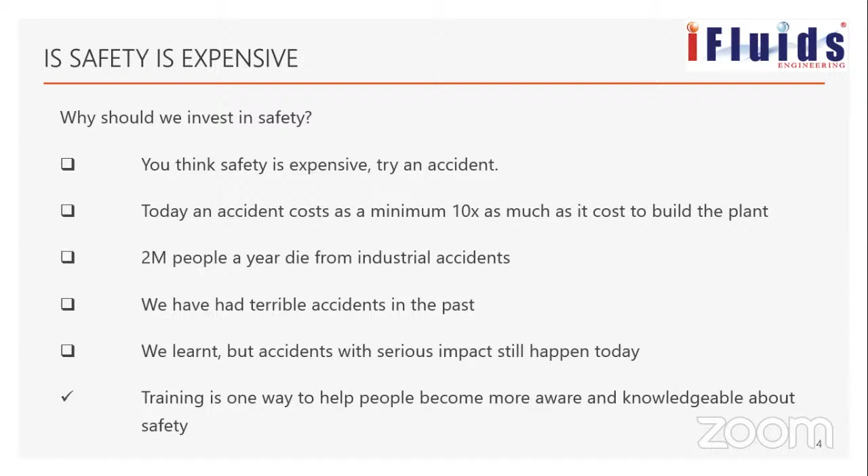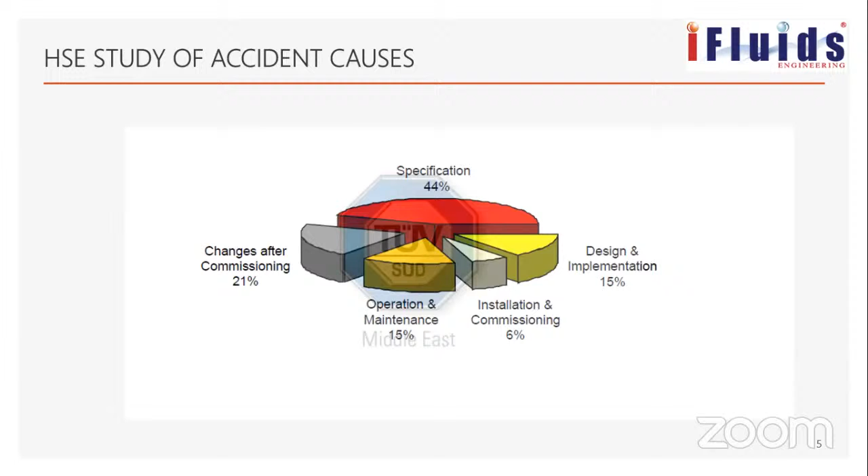This graph represents the various causes of accidents. Specification, not following the specified rules or regulations, or the material specification, contributes 44%. Changes after commissioning cause 21%, operation and maintenance 15%, installation and commissioning 6%, design and implementation 15%. These are the statistics that give the accident causes.

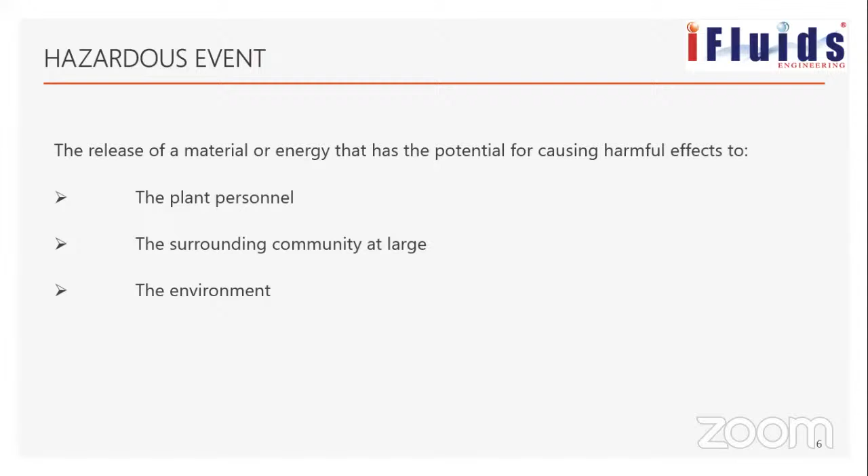Okay. A hazardous event is nothing but the release of energy or anything that has potential to cause harm to people, environment, asset, and reputation. In short, they call it PEAR. You can remember this word, pear, the fruit. It represents P for people, E for environment, A for asset, and R for reputation of the organization. Mostly R will not be taken into risk, because reputation cannot be quantified. That's why R will not be considered.

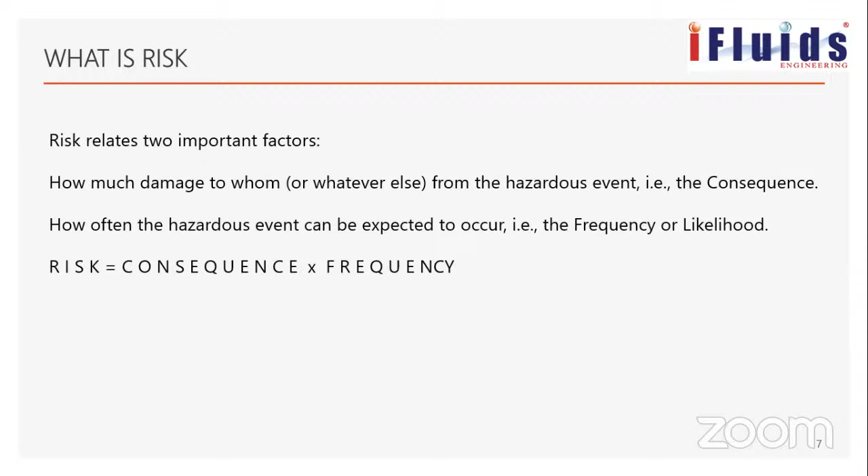Okay, risk. What is risk? Risk is nothing but the product of consequence and frequency. Consequence is what will happen, the extent of the damage. Frequency is nothing but the probability, or likelihood, of the thing happening. That is called risk: consequence and frequency. Okay. Hazard identification.

To be successful, to prevent any process hazard, it is very imperative to identify the hazard. There are different tools across the ages that have been introduced to identify the hazardous situation and prevent the risk.

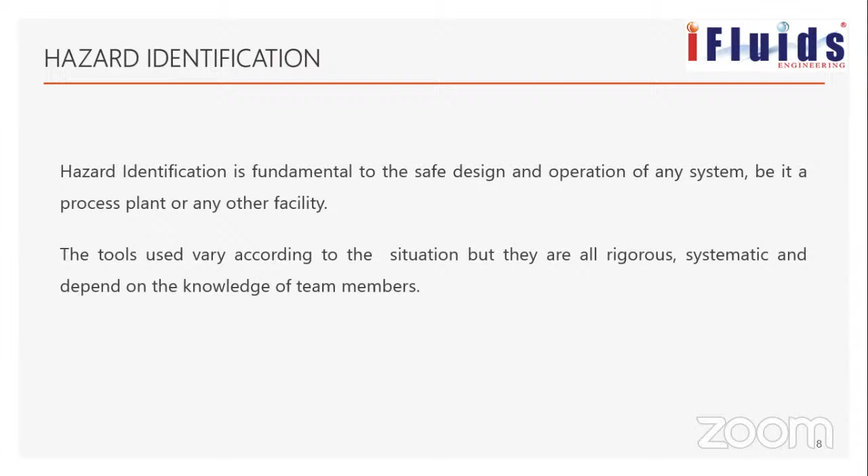One of such tools is the HAZOP. There are other tools, HAZID, ENVID. There are many tools. All those tools are used to identify the hazard and mitigate it.

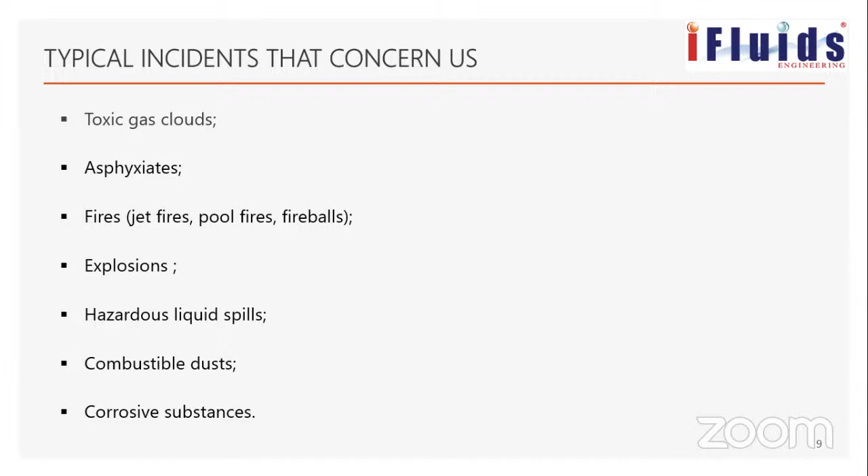A typical incident that occurs is nothing but UVCE, toxic gas, explosion, combustible - anything that damages people, environment, or the asset is nothing but a hazardous event.

What is PHA? Overview of PHA. PHA is nothing but a wider term used to identify process hazard analysis. It is a wide term. There are different techniques that are being used. This technique is used to identify any process hazard in a process.

This is not done by a single person. It is carried out by a team of people - multidisciplinary action. It is not a one-man show, but it is led by one person, contributed by different discipline people who come together to identify the hazard and come out with a recommendation to prevent it.

Mainly the success depends upon the experience and knowledge of the team. If the team is not having a good person with experience or knowledge, then the PHA is not going to work well.

Let's see the overview of the PHA assignment. When I say PHA, there are different methods - HAZID, HAZOP, QRA, all these things are process hazard analysis, ENVID. What-if analysis, bow tie - all these things are PHA.

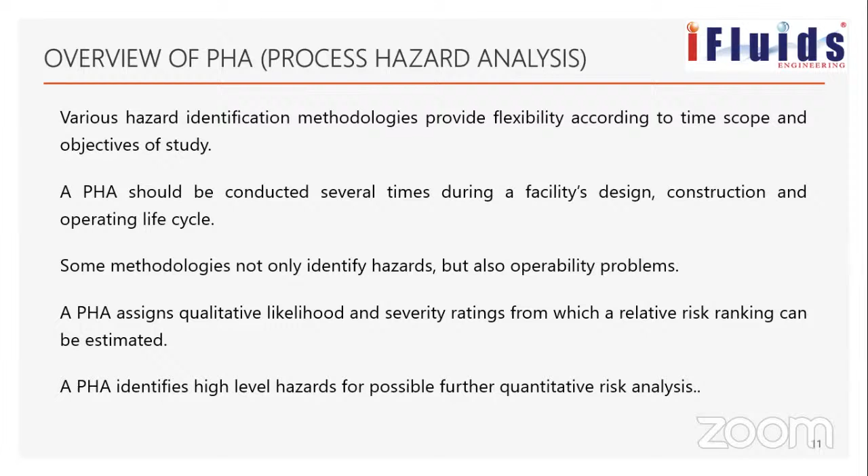Nowadays in India it is mandatory to conduct HAZOP every 5 years. So it can be conducted at any time during the phase of commissioning, startup, or during the running of the plant. Even when you do some changes to any system, or bring out some modification, then you carry out the PHA, that is HAZOP.

There is no time frame like that, that you have to carry it only during this time. What can go wrong, how likely it is, and what is the consequence - all of this put together is process hazard analysis.

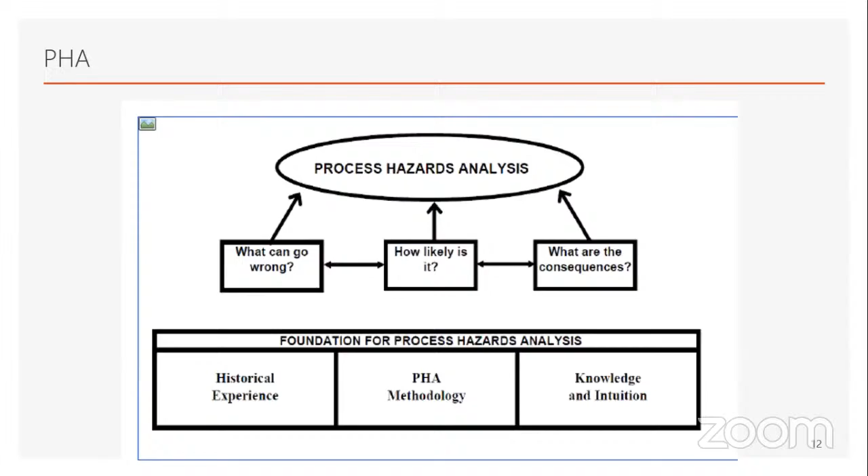History of PHA - now since we are dealing with HAZOP, I'll talk about HAZOP. HAZOP was developed in UK by Imperial Chemical over 30 years ago. Over the years it has undergone many changes. There is always improvement added, and a lot of guide words have been changed. Now the program is well structured and robust to identify the process hazard.

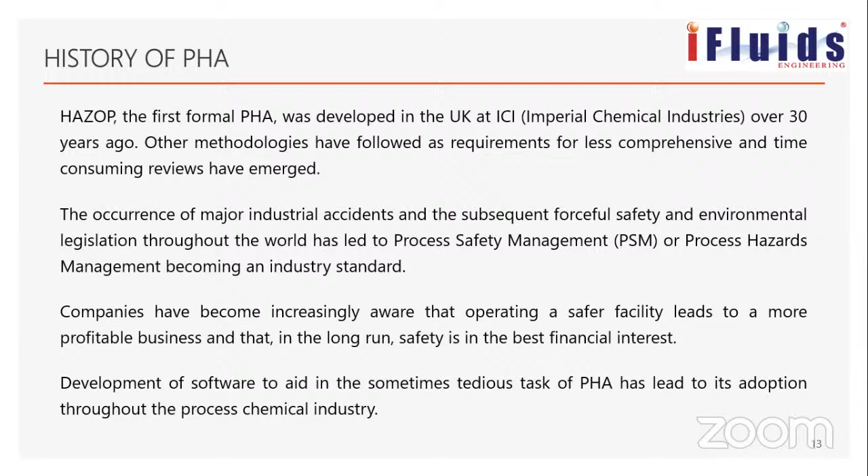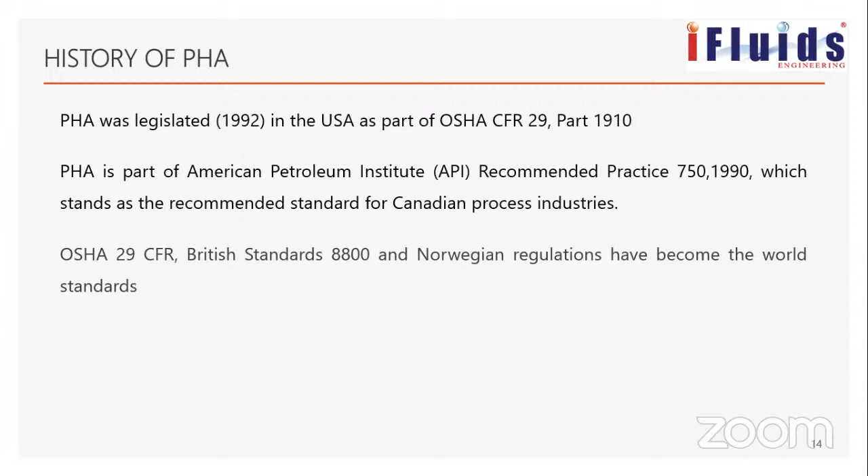As time progressed, now we use modern techniques like software to carry out this study. There was law also legislated in USA, and like in India we use OISD. It is a requirement to carry out PHA every 5 years.

Let's see process safety. There are two types of safety basically - one is process safety, another is occupational safety. Whenever I go, I tell this: process safety is nothing but like a tiger. The tiger, when it hunts, it hides itself.

It camouflages, it hides in a stealthy way without giving any symptoms. Whereas a lion, that is occupational safety - if you see it, you can see the lion in the open field, you can easily identify it. Like when you go to a plant, you can see people not wearing gloves, not wearing helmets, not working properly, not following ergonomics. You can identify all those things for occupational safety.

It is like lions in the open field - they lie in the open field and act. Whereas process safety, it is hidden. You don't know when it happens. But the accident caused by process safety is much more catastrophic, more expensive.

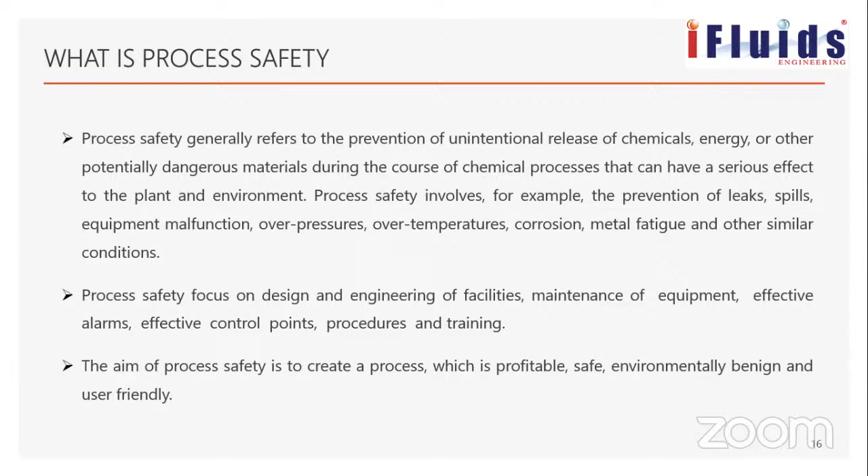Process safety philosophy. When process safety is considered, there are different layers protecting it. One is the process itself—a safe process by itself is a layer that protects process safety. Another is control and monitoring, that is your BPCS, basic process control system. Then comes prevention, mitigation, on-site emergency, and off-site emergency. These are all the layers put in place for process safety.

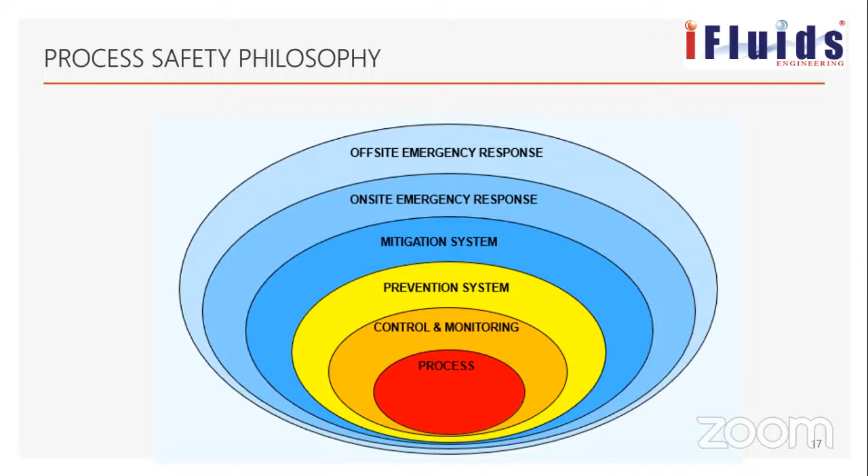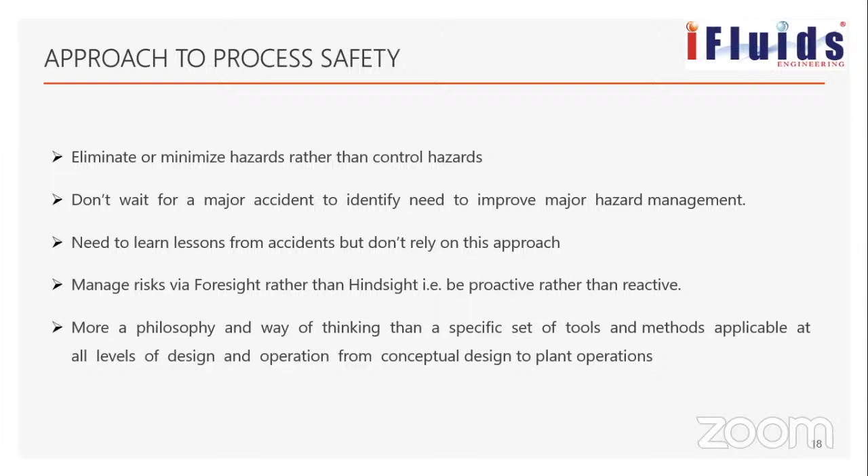Approach to process safety: our aim is always to eliminate the hazard rather than controlling it. When you cannot eliminate the hazard, you go for substitution. When substitution cannot be done, you go for engineering methods. When that cannot be done, you go for administrative controls. When that cannot be done, you go for personal safety, PPE, and all those things to protect yourself. This is the approach to process safety.

I'll tell you about one incident—everyone is aware of the Bhopal incident since we are in India. It is one of the worst accidents that has happened to mankind so far regarding process hazard. I'll tell you another example, Piper Alpha, which is also one of the worst accidents that happened. I'll give you a brief explanation in 5 to 10 minutes.

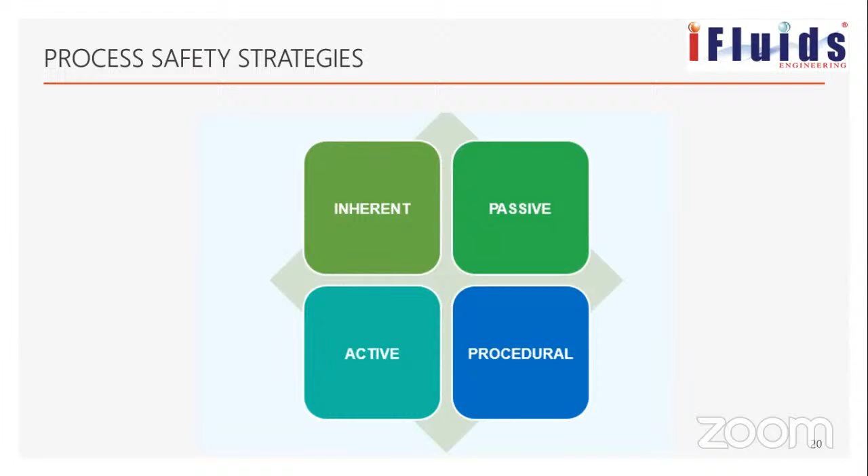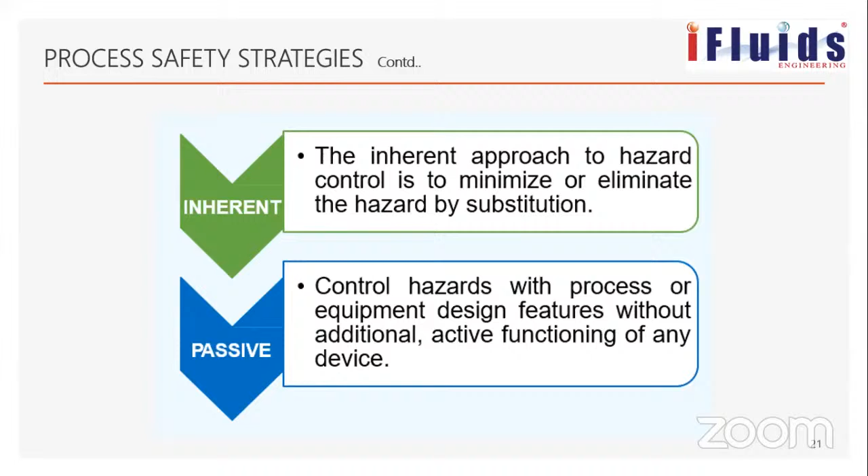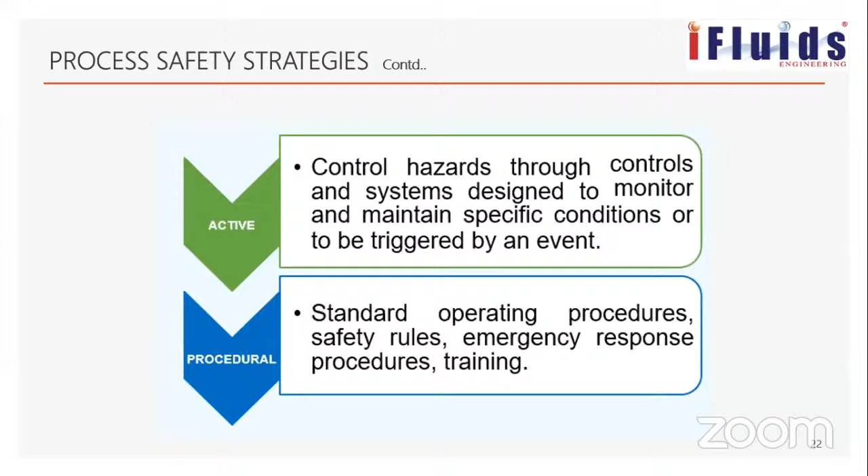What is the strategy to control it? There's inherent, passive, active, and procedure—these are the strategies to control the process. Inherent is to eliminate the hazard by substitution, as I stated. Passive is controlling the hazard without any active functioning of devices. Active is to control the hazard through system design and monitoring, with specific conditions triggered by an event, using control valves. Next is procedure—administrative controls put in place. This is the hierarchy of controlling.

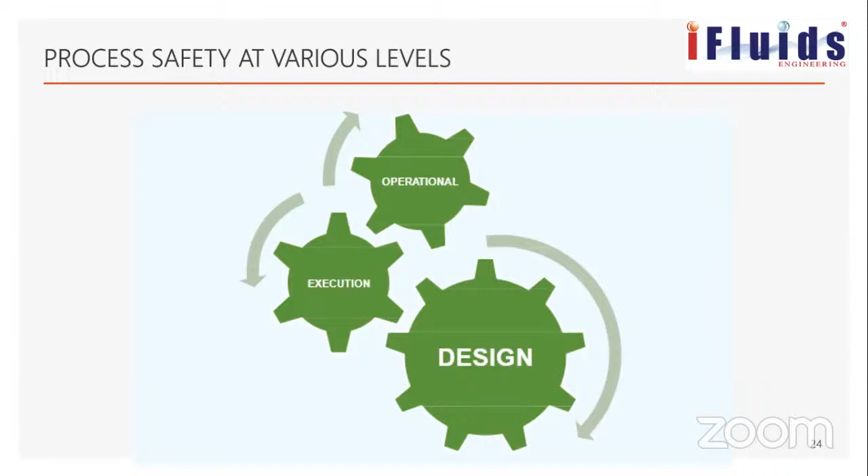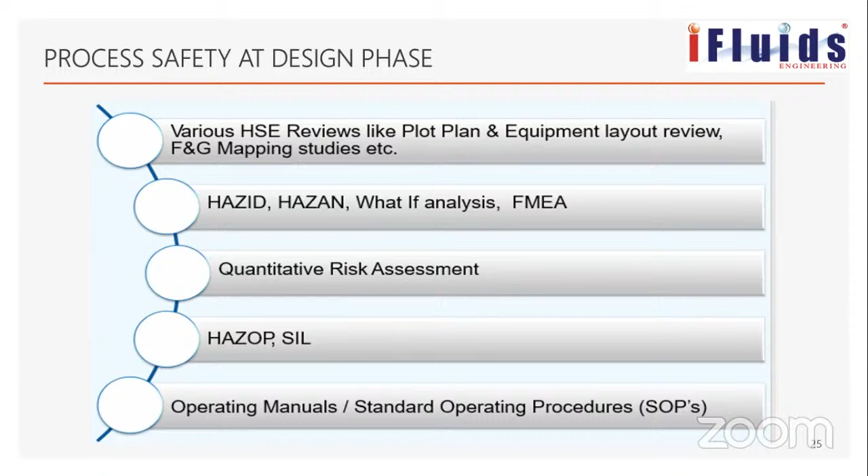Process safety design phase. There are various HSE reviews during the design phase that have to be carried out, like HAZID, HAZAN, what-if analysis, quantitative risk assessment, and HAZOP. These are all carried out during the design phase of process safety.

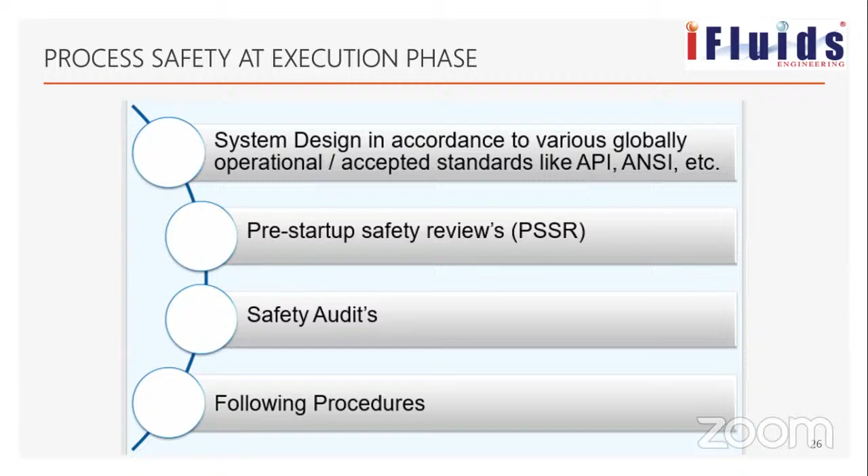These are safety at execution phase: pre-startup safety review, safety audit, following the procedure. All these things we carry out during the execution phase. Another one is the operational phase: safety audit, management of change, revisiting the HAZOP every 5 years. These are the methods carried out during the operational phase.

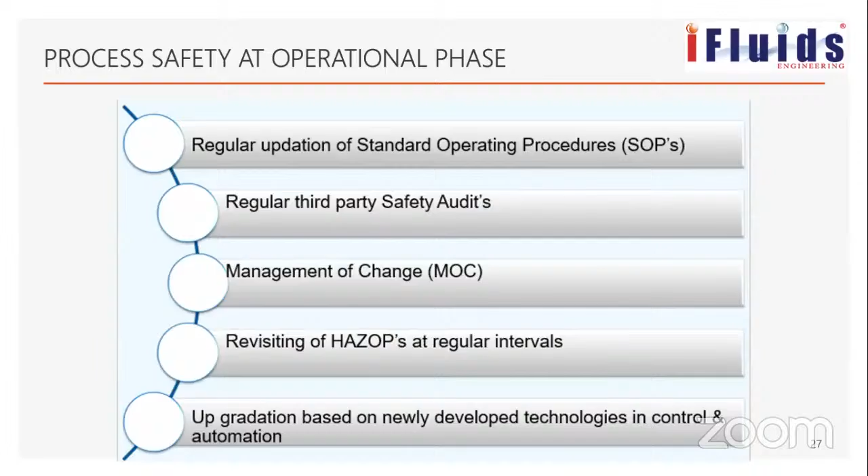PSM is nothing but process safety management. There are different standards. Some people follow 14 elements, some follow 18, some follow 20. All these are different elements carried out to maintain the safety of the process of the plant.

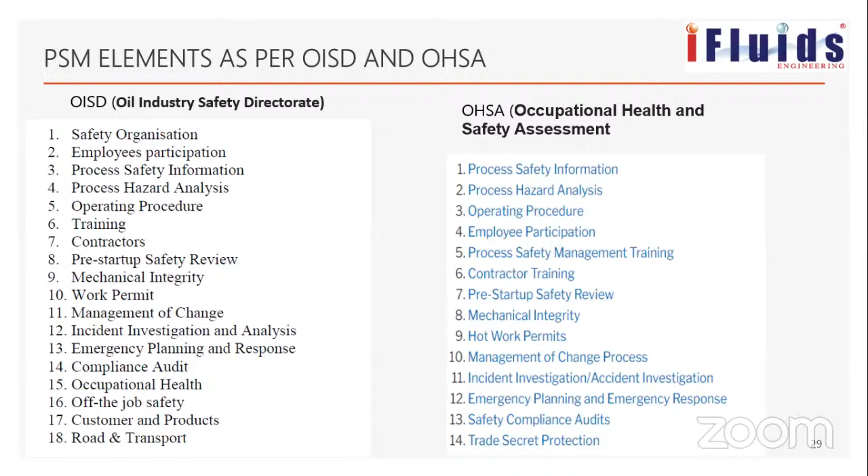This is a simple graphical representation of how PSM is represented. There are 20 pillars. The base foundation of the pillars is managing the risk, learning from experience, understanding the hazard and risk, and committing to process safety. These form the fundamental base upon which the pillars stand, and above that is the roof of process safety.

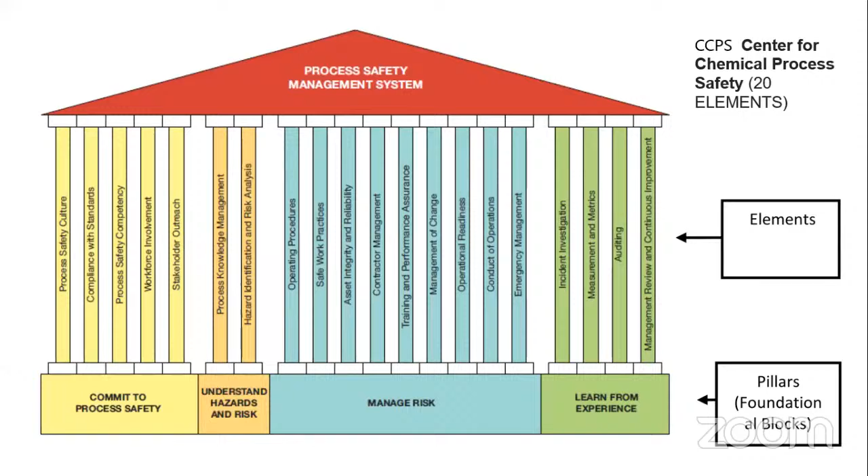The Center for Chemical Process Safety has 20 elements, while OISD has 18 elements. Now we will talk about what HAZOP is.

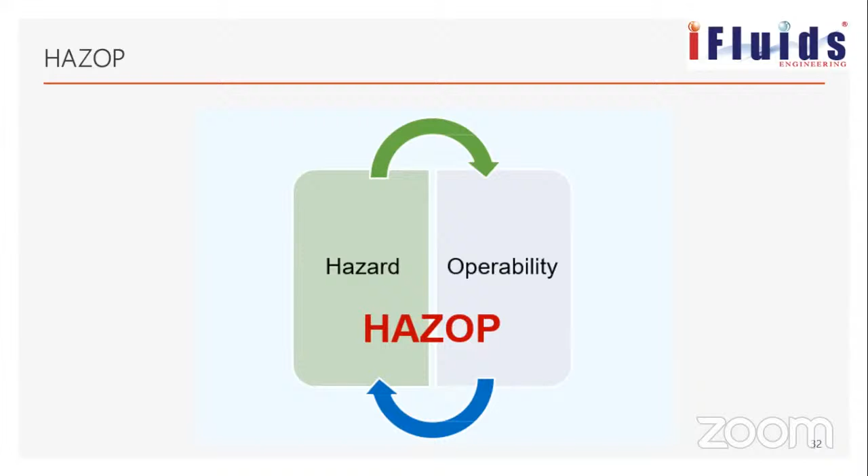This is our main topic for today: HAZOP, which is nothing but Hazard and Operability Study. HAZOP is a qualitative method. Whenever I say qualitative, I mean defining the risk in words. When I say quantitative, I mean describing it in terms of numbers. So HAZOP is mostly a qualitative method, sometimes semi-quantitative.

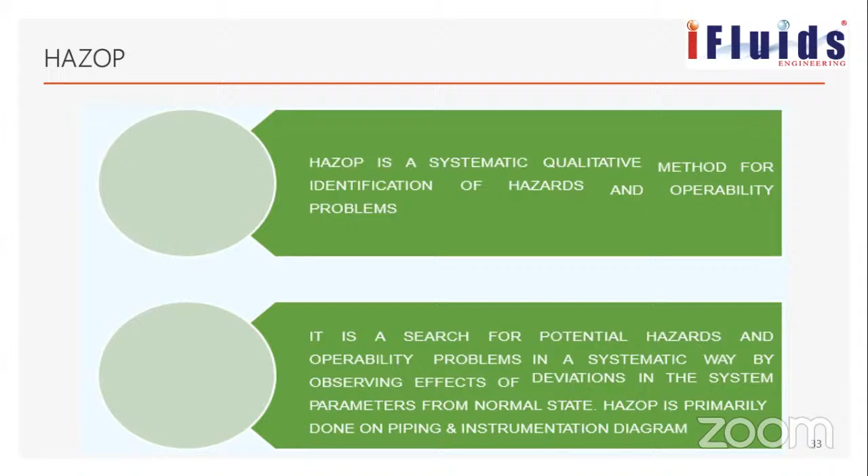What we do in HAZOP is search for the hazard and the causes for the hazard. Our aim is not to eliminate the hazard, but to find the hazard and recommend ways to minimize it. This is the main aim of HAZOP.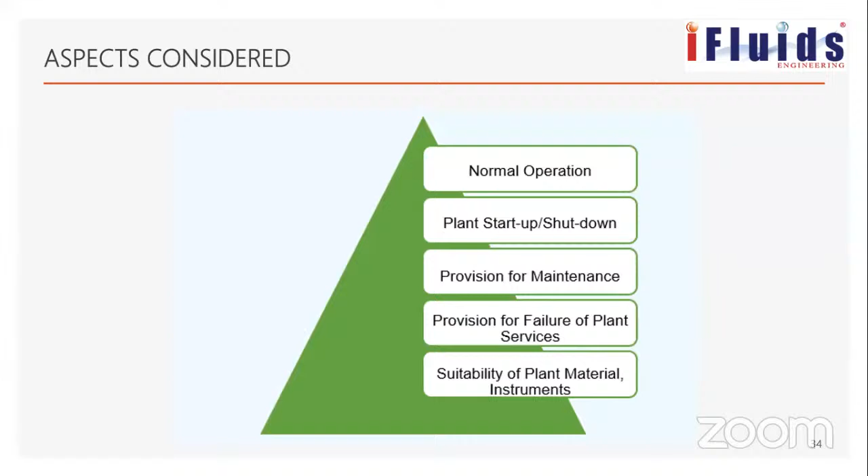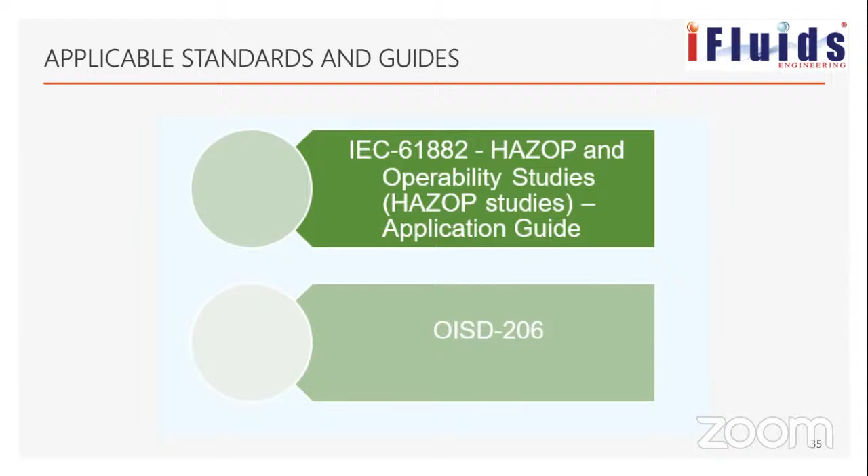HAZOP can be carried out during normal operation, during plant commissioning, and during maintenance. The standard usually followed is IEC 61882, the international standard. OISD 206 is essentially a replica of IEC 61882. This is the standard followed to carry out HAZOP.

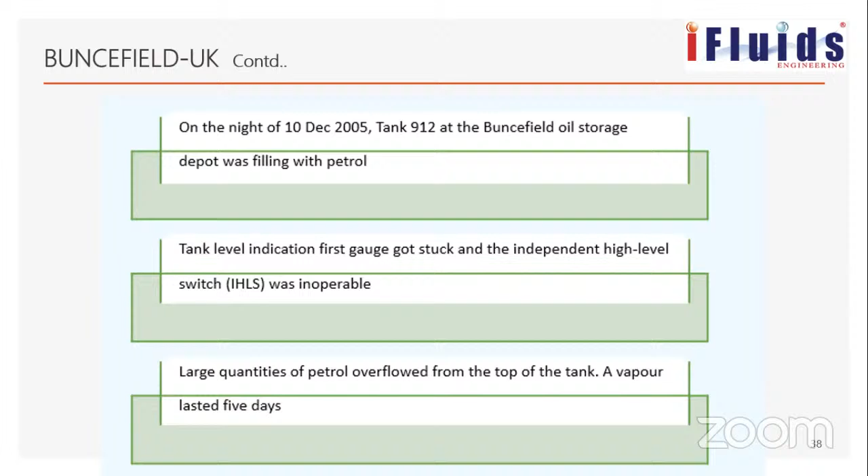As I described earlier with one case study, here's another one: the Buncefield, UK incident. They were filling a tank with gasoline, and it overflowed because the level high switch got stuck. The gasoline overflowed from the tank, its vapor stayed there, and it got ignited. The hazard was that the level switch wasn't working, maybe because it hadn't been maintained properly, and that's why it got ignited.

How is HAZOP carried out? Our aim for HAZOP is to identify the hazard in the process. How is hazard identification carried out? This is the approach to HAZOP.

Our aim is to define the objective and scope: to check the design of a new unit and how it's going to work, to improve the safety of an existing unit, to check the running and operating instructions, and to check modifications carried out. This is our aim.

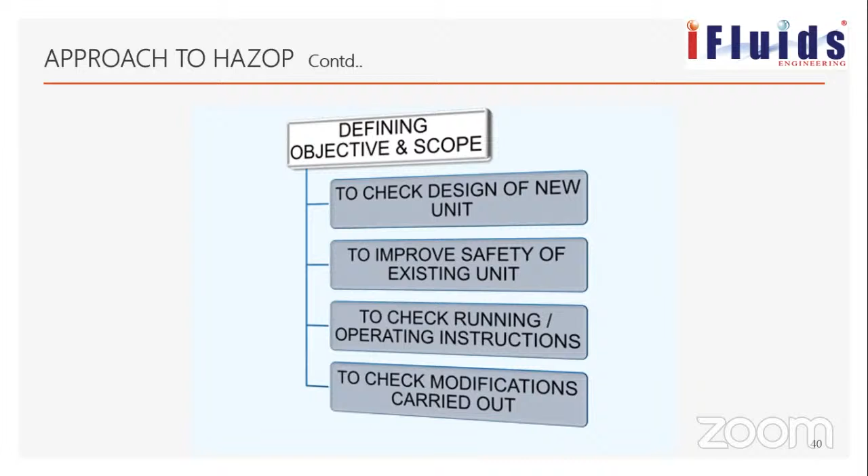Okay. Prerequisite. What is the prerequisite? What is the required document? Our required documents for carrying out HAZOP are the process design basis, process description, and process PFD. Okay, we need to know what the process is, so we need a description for it.

Then we need the PFD. PFD is nothing but the process flow diagram, right? Usually when we say process flow diagram, the diagram is divided into different streams, and every stream has temperature, pressure, flow, density; all these values will be given in the PFD. Then P&ID, piping and instrument diagram.

Then interlock, that is your cause and effect. Then operation: POM, plant operating manual, all operating procedures. These are the required documents to carry out a HAZOP. Only when you know the process and you know the P&ID, how the flow goes and what are the valves and different equipment in it, can you know it.

And you want to know the interlock: what happens when this valve closes, or if the ESD trips, what other valves close; you need to have it. And you need the operational and maintenance procedures also. You want to know the plant, at least to know what will be the cause and consequence of it.

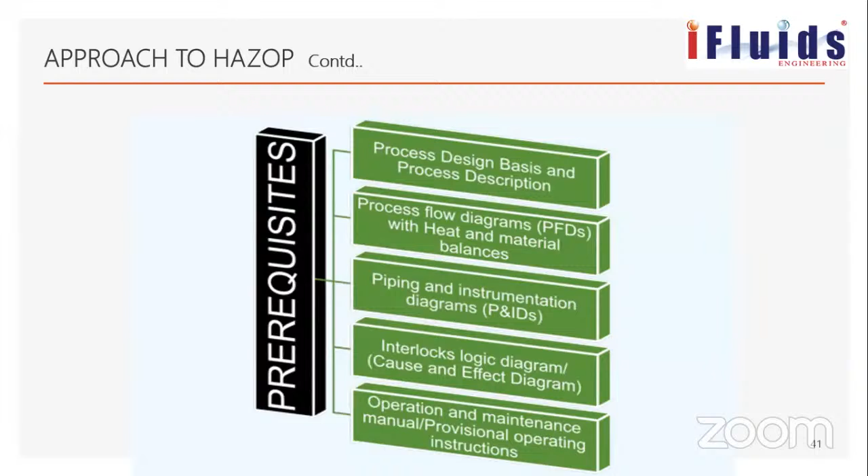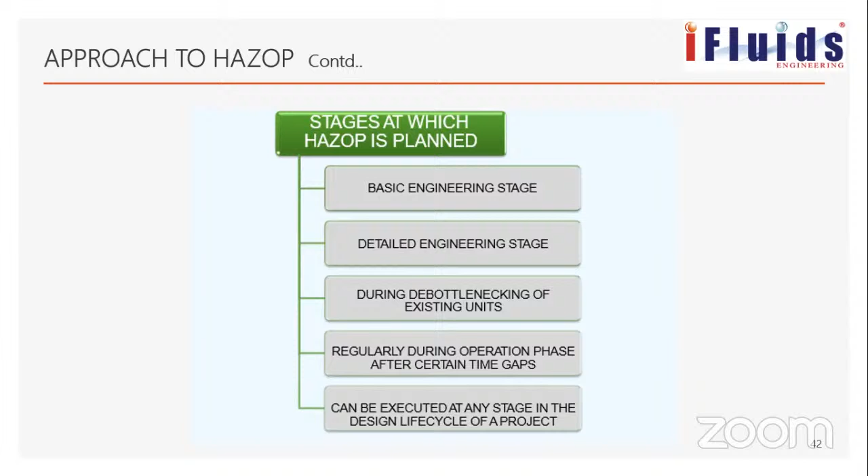See, as I told you, it can be carried out in the basic engineering stage, detailed engineering, during debottlenecking, during regular operation, and at any time of the project or of your running unit. It can be carried out at any stage. Who are the team members?

Usually the chairperson. The HAZOP chairperson is the person who leads the team, and the HAZOP scribe is the person who collects all the information and records it. Process engineer, instrument engineer, safety engineer, production operations engineer and operator, an experienced operator is a must, and the maintenance engineer.

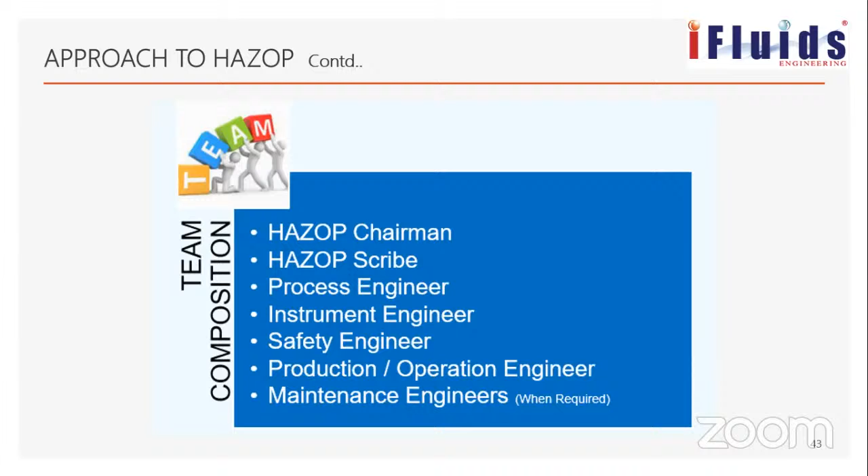The HAZOP chairman is the person who stimulates and leads the team, puts the questions, and makes everyone participate in the discussion. Again, HAZOP is not a one-man's job. It is a team effort. The success of the HAZOP depends upon the participation of each and every member. So the HAZOP chairman's duty is to ensure that every team member participates and contributes effectively for a successful HAZOP.

HAZOP preparation. Now let's see how HAZOP is prepared. I will go step by step: dividing the process into systems as per the process intention. First our aim is to take a unit, any unit. Then you divide it into small sections. Then each small section is broken into small streams, and these streams are called nodes.

First I'm going to take a big process, and if possible break it into smaller units, small sections, and break the small sections into small streams, and I'm going to call every stream a node. Why I'm doing this is because process industries are a chain of units. It is very complicated; everything is interconnected. It is difficult to write the cause and consequence for it as a whole.

So I'm going to break it into smaller sections and apply the deviation and see for each and every node what the effect will be. And whenever we break it into nodes, we should ensure it is neither too big nor too small. If it is too small, you will have a huge number of nodes and there will be confusion; you will not have effective cause and consequence. If it is very big, you will get confused. So it should be neither too big nor too small.

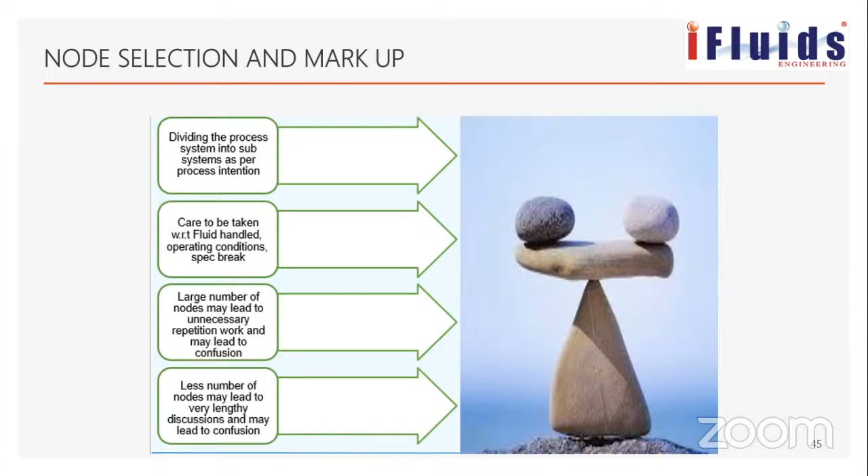So you separate it based on the experience of the chairman. The chairman is the person who decides the nodes and he floats the nodes across the team for consensus. Okay, next one: key terms in HAZOP and procedure. We will see the key terms: node, parameter, guide word, cause, consequence, safeguards, and recommendation. These are some of the terms used frequently in HAZOP. So let's go one by one.

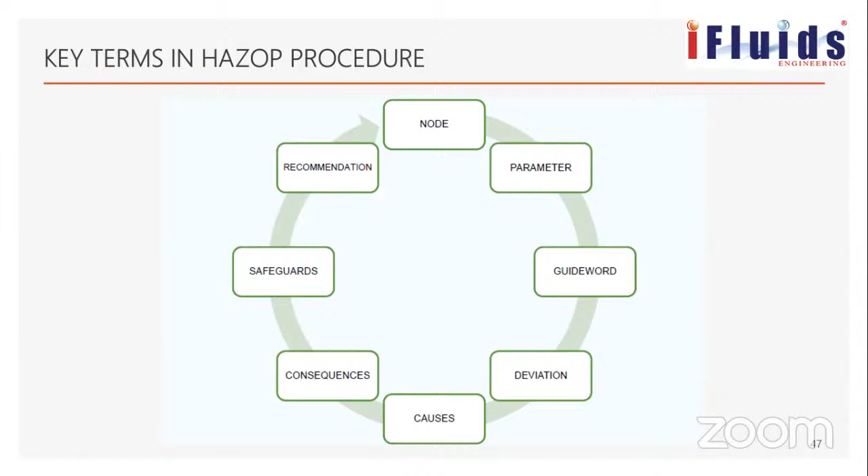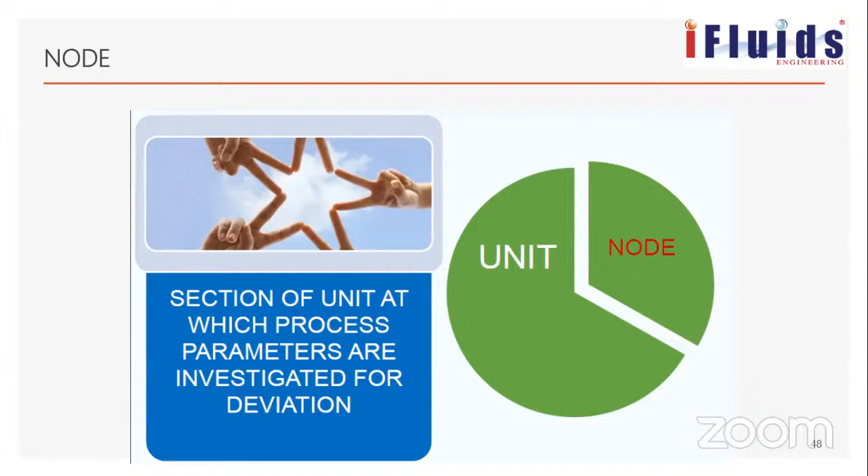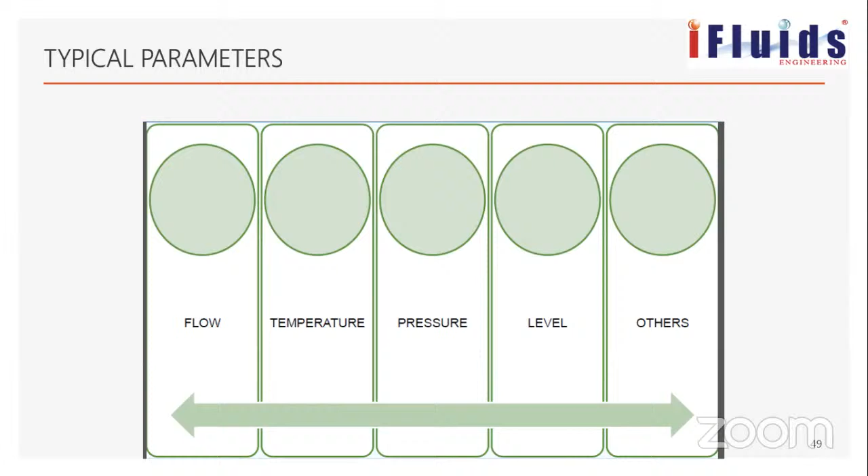Okay, node. As I told you, we break it into smaller things for convenience and to be more efficient. Those small streams are called nodes. Then what are parameters? Parameters are flow, temperature, pressure, level, composition and others. Those are some of the parameters used. And we use what are called guide words. The guide words are no, more, less, as well as, reverse, other than, and others.

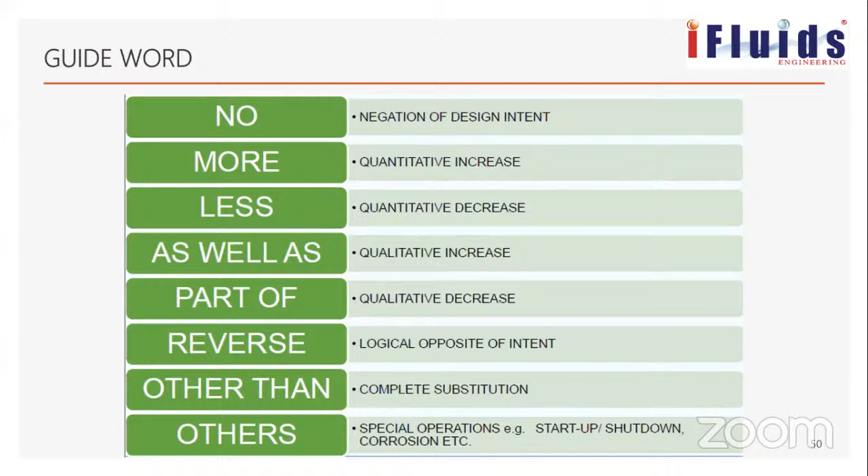So when I combine the guide word and the parameter, it becomes a deviation. See, I take a small flow, a node. Say liquid is coming, the liquid outlet of a separator. That is my node. So I apply the deviation. How do I apply it? I take the parameter flow. In HAZOP we mostly take flow first. Why? When we take flow, we cover pressure, temperature, and level, directly or indirectly.

My guide word is going to be no. First I'll take no or less: no flow from the separator. That is the deviation. So what will be the cause for it? I'll write it next. So my deviation is nothing but guide word plus parameter: no flow, less temperature, more pressure, less pressure. This will be my deviation, and I apply this deviation to the node.

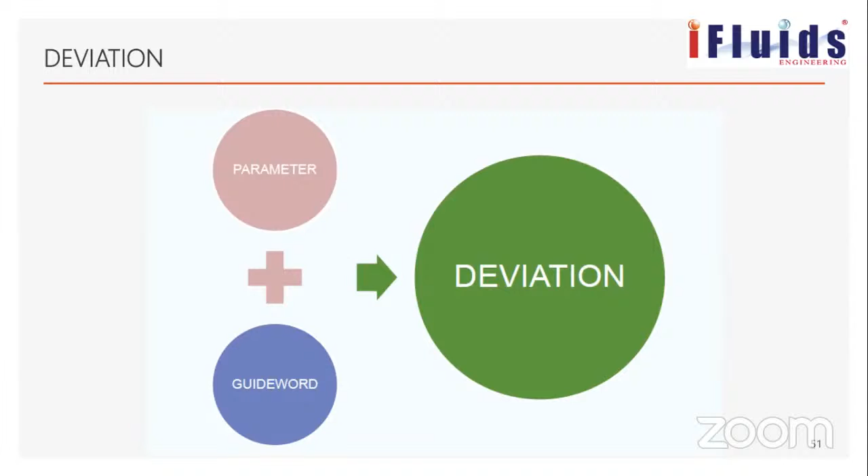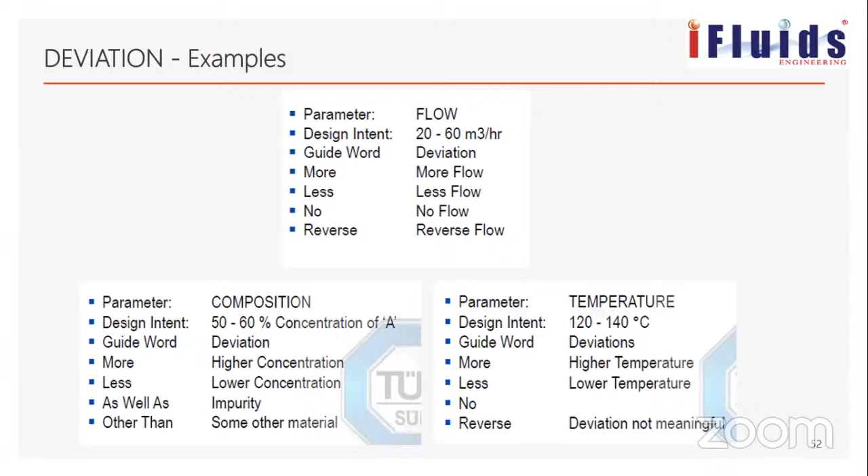Deviations, I told you, right? Parameter flow, temperature; more temperature, less temperature. These are the guide words, and these are some examples of deviations. Then we have to write the cause. After taking the node, I apply the deviation to the node. I say more flow, say more flow of condensate to the separator. This is my deviation, and I have to say what is causing this deviation.

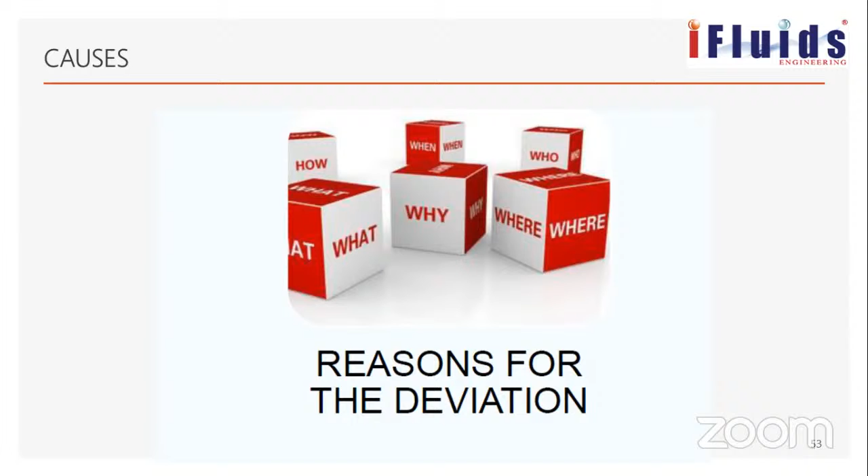When there is a deviation, I give the cause, the reason or conditions. For more flow, I may say the control valve was opened fully. That will be one of the causes. If there is no flow, I'll say the pump has tripped or the valve was closed. Whatever causes the deviation, I write it. First I write the deviation, then the cause: what has caused this deviation.

After that, I am going to write the consequence. First I have written my cause. Now I write the consequence. Consequence is nothing but what happens. Suppose there is no flow at the outlet of the separator, what happens? The level is going to increase. When the level increases, what will happen?

I should not simply write level rise in the separator. It has to result in some hazard. Maybe it will pressurize the vessel: over-pressurization of the vessel, or it must lead to some LOC, carryover of liquid to the flare header. These are the consequences. The consequence must be defined as leading to a hazard. That is the aim. What will be the consequence?

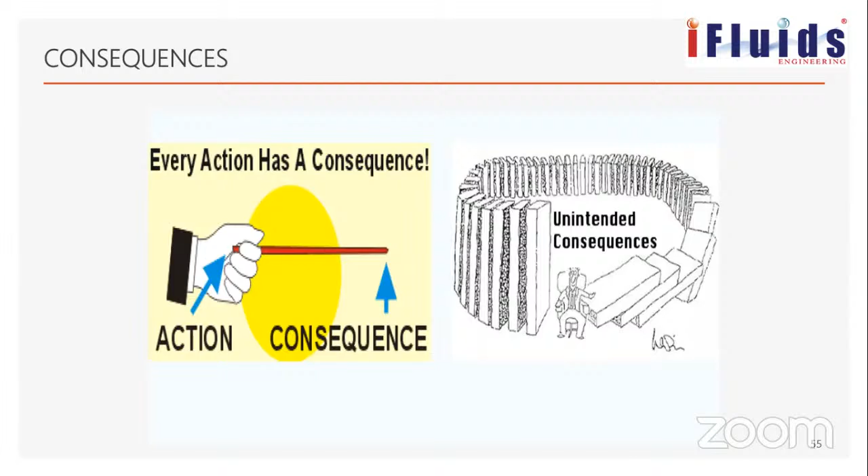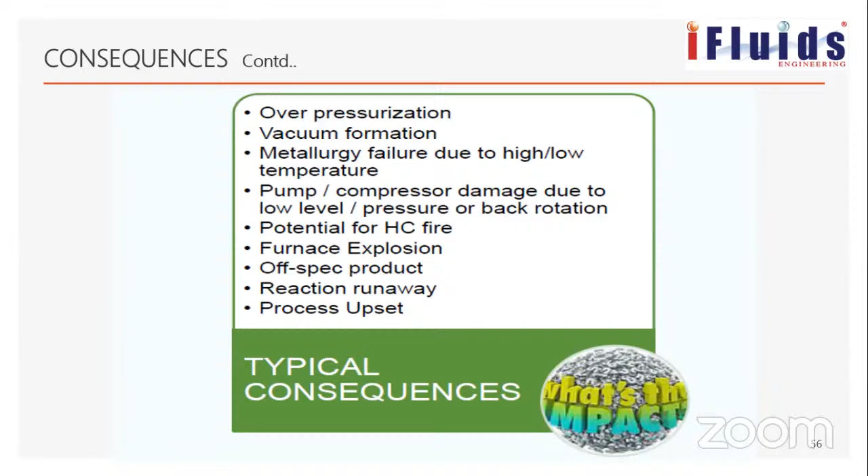Okay, consequence: over-pressurization, vacuum formation, damage to the pump. When I say overpressure, maybe there is overpressure leading to explosion, damage to the equipment. When I say pump, no level in the vessel, I'll say damage to the pump. Off-spec product, some LOC must be there, or upsets, but it has to be resulting in some damage. We have to write the consequence.

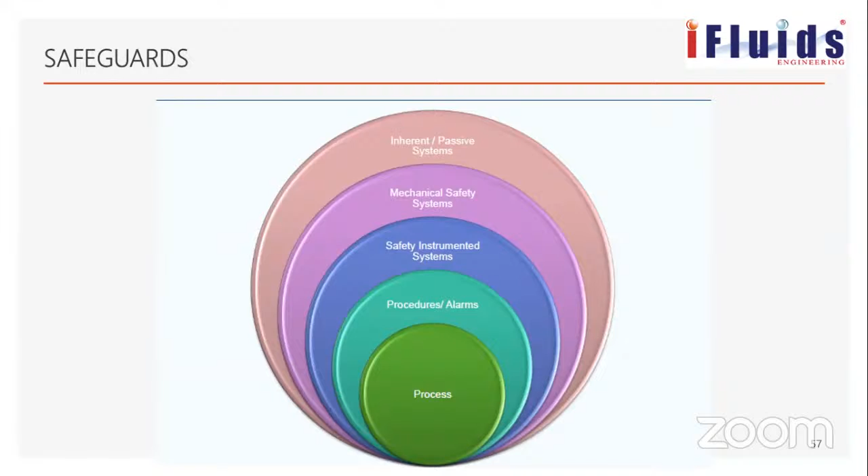Okay, safeguards. When I say safeguard, I have to write process, procedure, alarms. The well-designed process is also one of the safeguards. Another one is procedures and alarms. Alarms is nothing but whenever there is a deviation, there is an alarm followed by action by the operator. Then safety instrumented system, nothing but the SIF. Then mechanical safety is nothing but your PSV, and passive dyke wall, or your firewall, or your inherent passive systems.

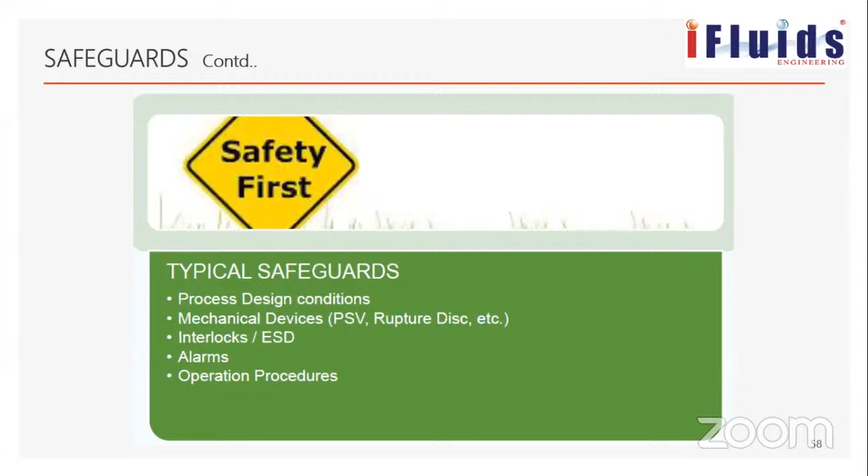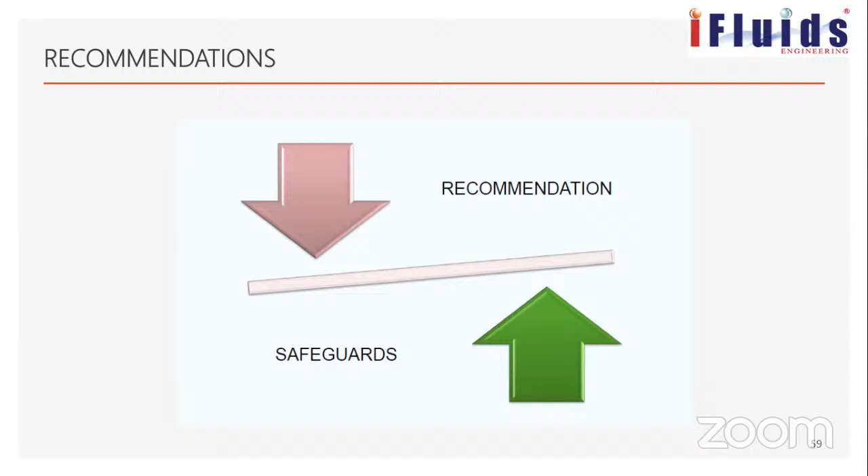Next one, typical safeguards. The PSVs, interlocks, alarms, all those things are your safeguards. After putting the safeguards, we do something called risk ranking, which I will describe. Then, if the risk is still high, we come out with a recommendation to reduce it. Okay, next one. Action plan.

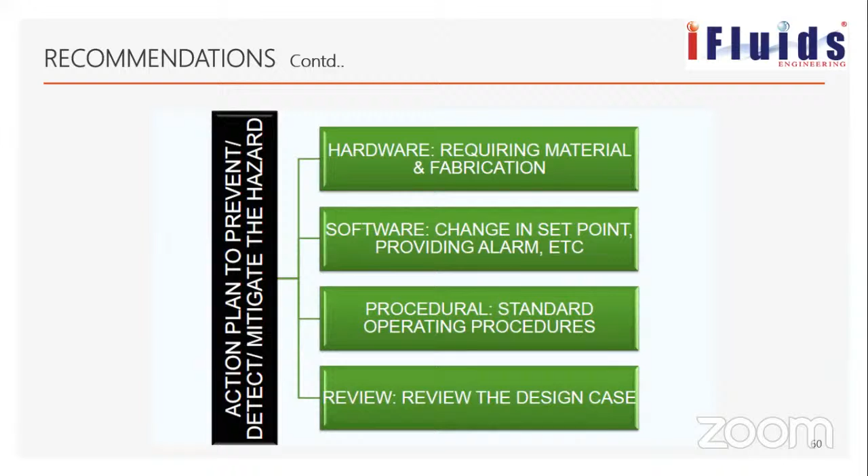The recommendation can be procedural or engineering, or soft alarms, then hardware changes, any changes that can be done, or review of the design. These are some of the recommendations, how HAZOP has to be.

Now our aim. HAZOP is nothing but, as I told you, a brainstorming session. Our aim is to find only the hazard. Our aim is not to discuss the design aspect. Unnecessary discussion will be carried out when a group of people come together; that has to be avoided, and we have to stick to the time frame.

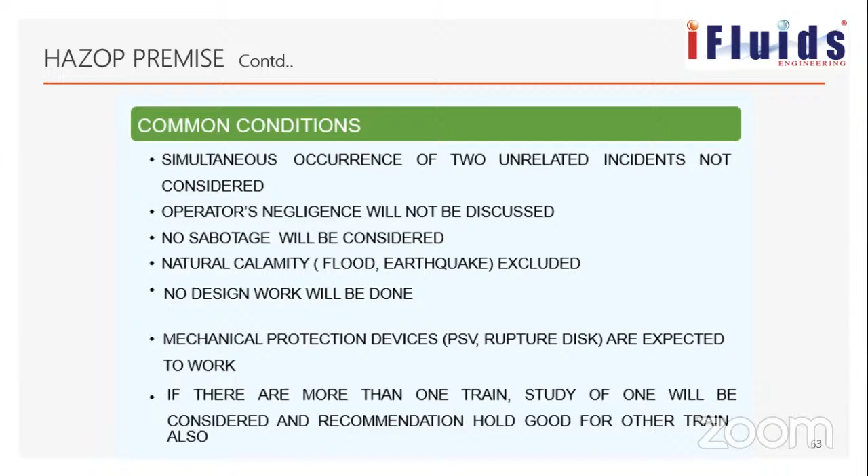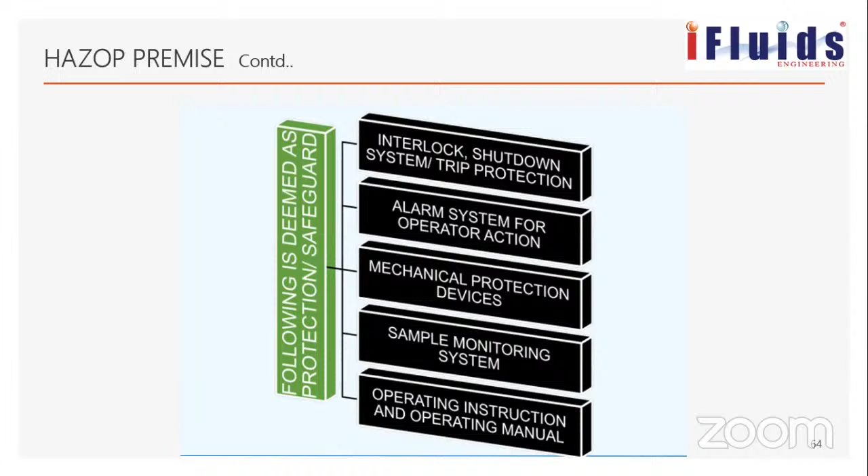We should not take the failure of the ultimate safeguard like PSV. If there are two identical systems and you do HAZOP for one system, the other one is considered done; you change only the tag numbers. Following interlock, shutdown, alarm: as I told you in the previous slide, these are some of the safeguards. Already we have seen it.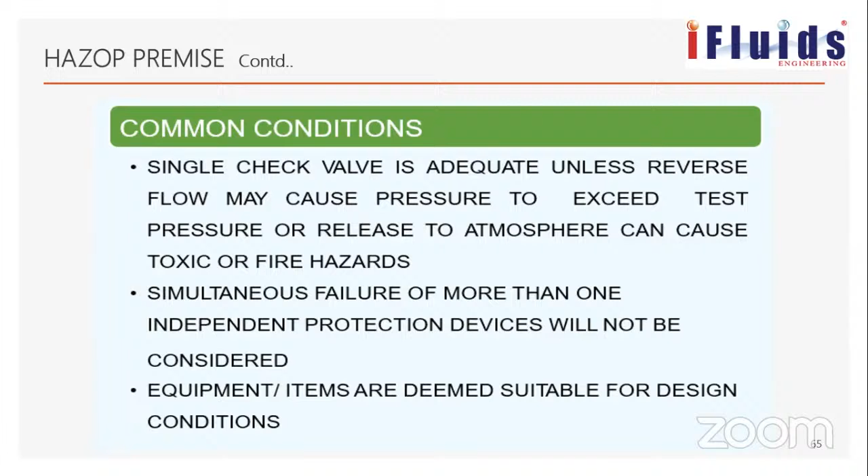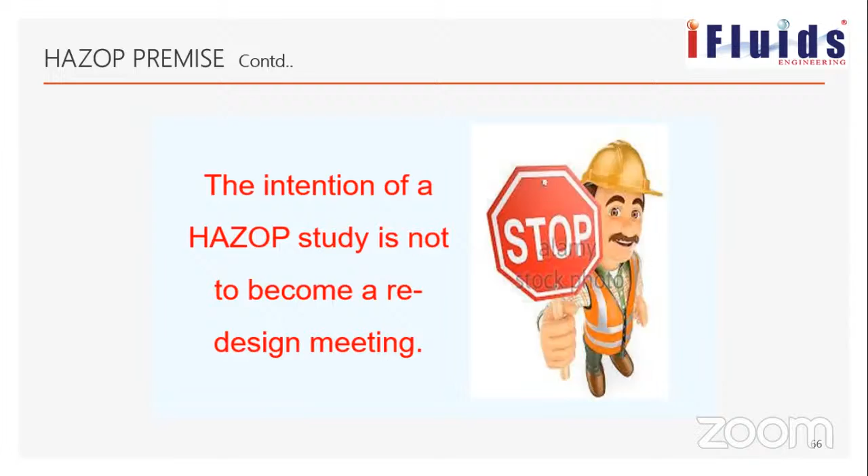What are the things that should be considered? A single block valve, check valve, NRV is considered safe, unless it is going to lead to over-pressurization of the system. Other than that, one NRV is sufficient to protect against reverse flow. As I say, simultaneous failure should not be considered. The intention of the HAZOP study is not to become a redesign meeting. It's not the place to discuss the design.

Pitfalls. What are the pitfalls? Shortcomings. Error identification: if you are poor in identifying hazards, you don't have a clear P&ID, an inexperienced HAZOP team, unrealistic schedule. If you complete 10 nodes in a day, it is unrealistic. Lack of interest and biased approach. Lack of interest: HAZOP is a laborious process, it is monotonous. You keep on doing it, then you lose interest.

People lose interest. Biased approach means a person takes sides, goes along with operations, or sometimes process engineering or instrumentation. As a chairman, a person does not take sides. He has to facilitate the meeting.

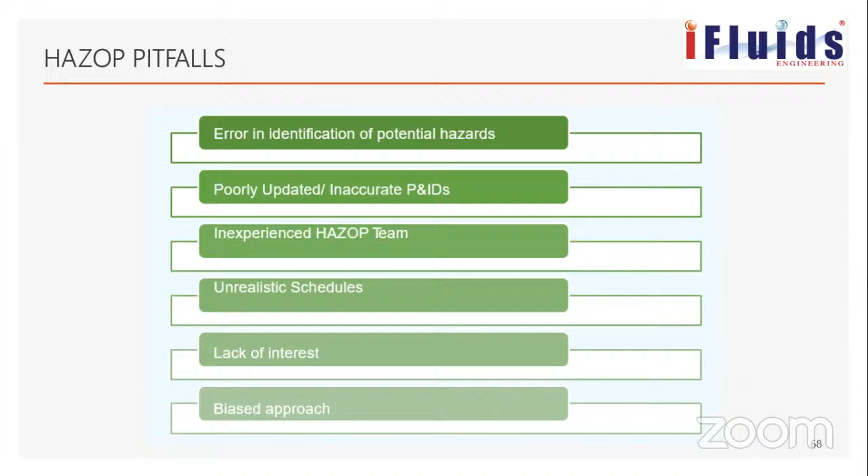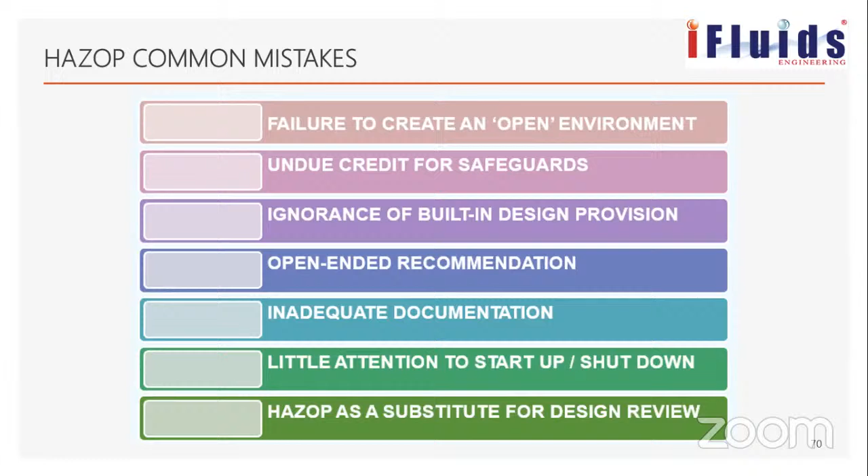HAZOP common mistakes. Failure to create an open environment. Undue credit for safeguards: there are certain rules for giving credit, and credit should be given accordingly, and whatever built-in design there is has to be taken. Open-ended recommendations should not be there. Inadequate documentation. Little attention to startup and shutdown. HAZOP as a substitute for design review; it should not be. These are the mistakes.

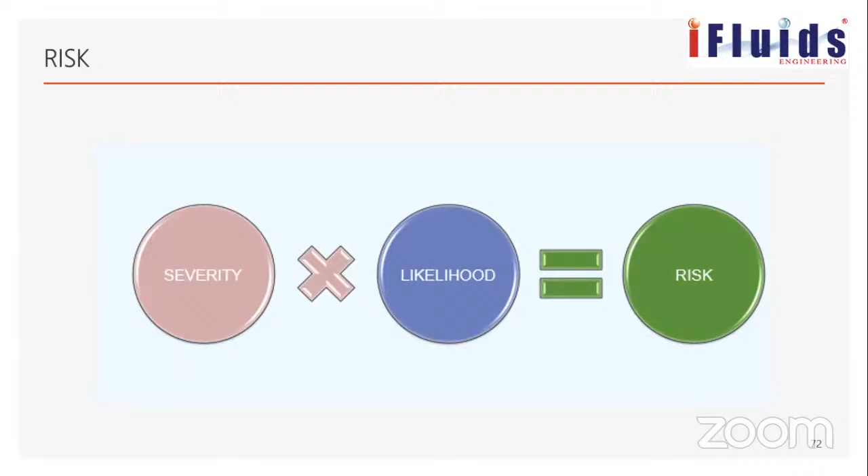The most important thing is risk ranking. As we discussed, risk is nothing but the product of severity and likelihood. This changes from organization to organization; this is the common way it is done, not a fixed one. This is just an example, say from Caltex: C1, C2, C3, C4. It depends upon the matrix. Some stop at C4 itself; there is a 3x4 or 4x4 matrix also.

This is for the asset damage. They take the damage in terms of injury to personnel, damage to the asset, and to the environment. Reputation usually they don't take during the HAZOP, because it is difficult to quantify the loss due to the impact on reputation, how far it is going to go.

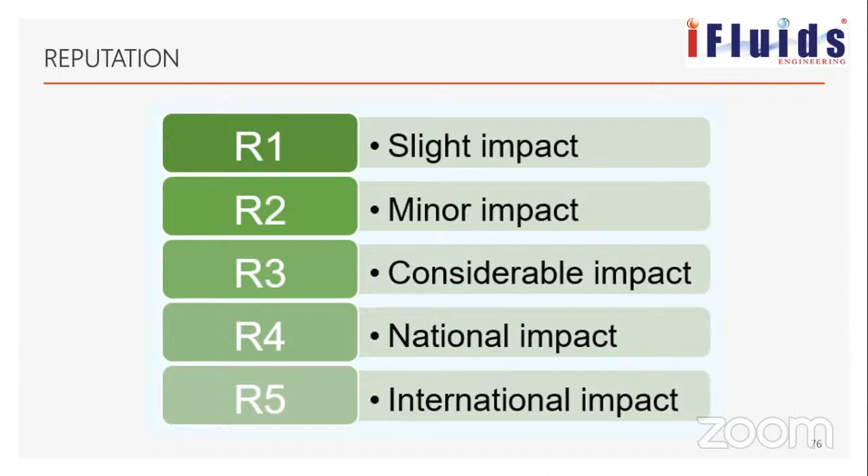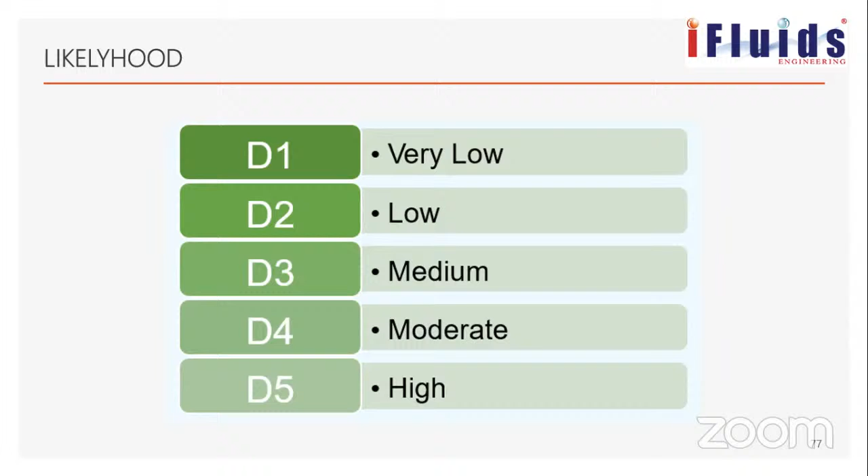Likelihood they take based on the history of the organization. If it is within one organization, they take it from there. If it is a group of companies, they take it across the group. Some people go further and look into other industries around and take it from there. This is how the matrix looks.

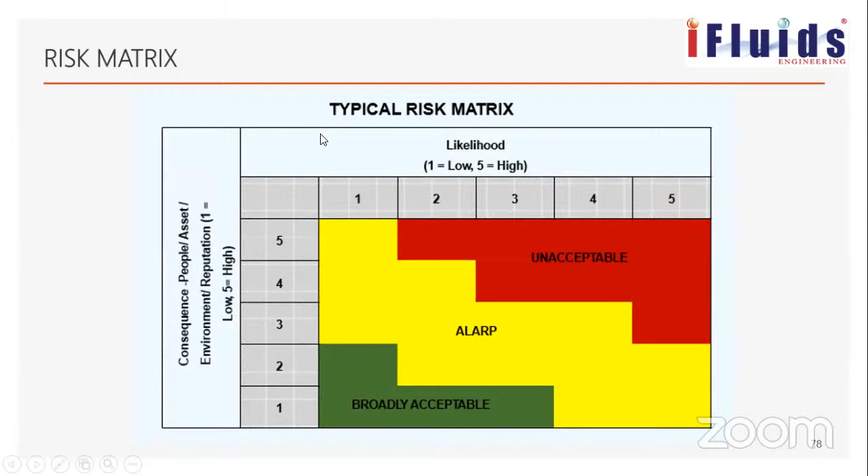Likelihood versus severity. Wherever you fall within the green range, it is accepted. The yellow is ALARP, which is also accepted. The red is the unacceptable range. Whenever you fall in the unacceptable range, you go for a recommendation.

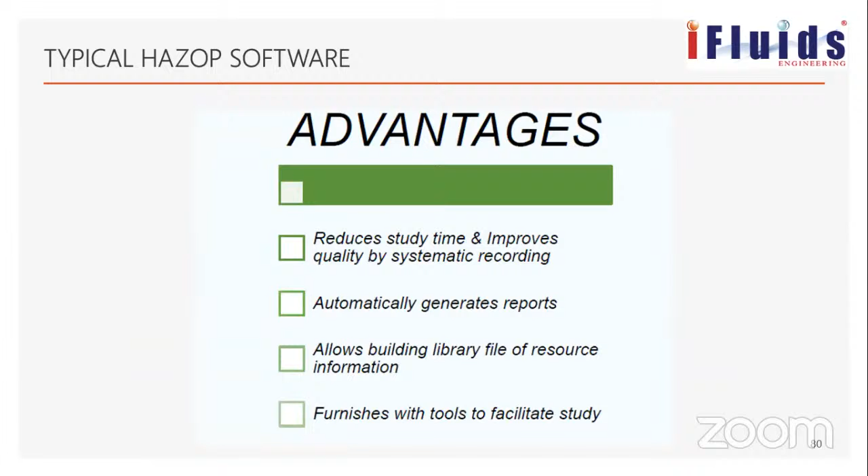HAZOP software: I told you there are different software. The software helps in carrying out your job easily. It is resourceful, it automatically generates the report, and you can just refer to the same cause and consequence if it is there, and put in the files also. There are PHA Works, PHA Pro, PHA Leader; different software is available in the market now.